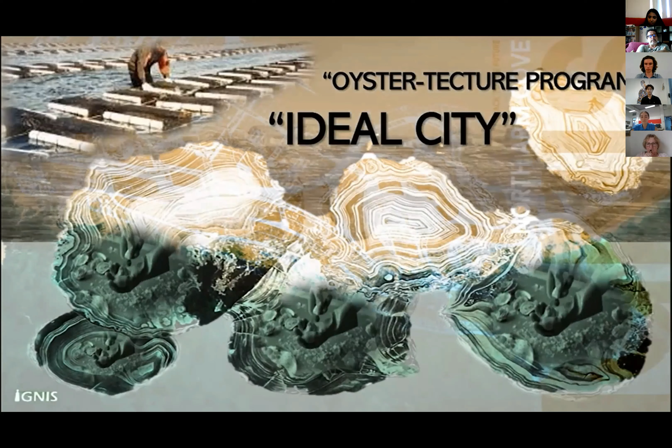By returning to Walter Burley Griffin's vision for an environmentally driven North Arm Cove, an understanding of ecological communities may be applied to optimize the human community in symbiosis with the rest of life, and bring to fruition the interconnectedness of man and nature understood by its traditional custodians, the Worimi people.

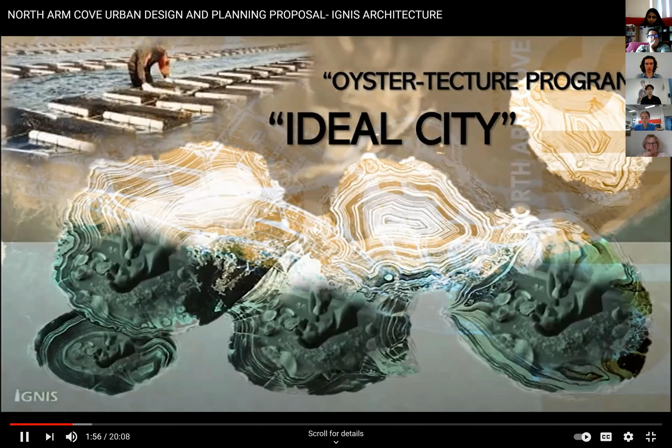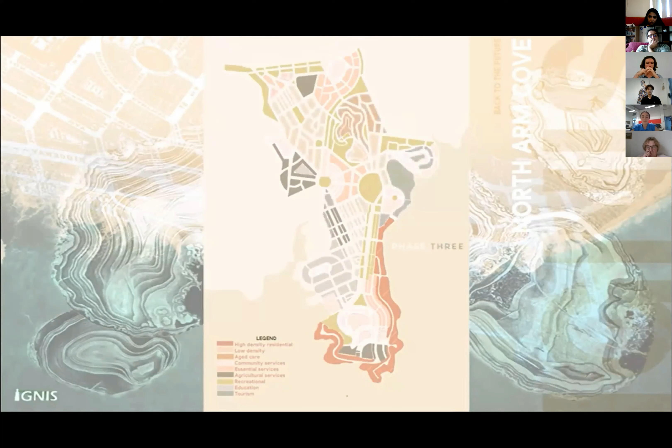To emulate nature's fundamentally collaborative pattern of whole system regeneration and growth, long-term vitality of all participants depends on the health of the entire ecosystem, allowing populations to survive and thrive in the face of growth, social isolation, and climate change. To structure the growth of Oyster-tecture, phases will categorize sectors of focus, throughout which collective participation in sustainable community and human settlement design nourishes a sense of place and identity.

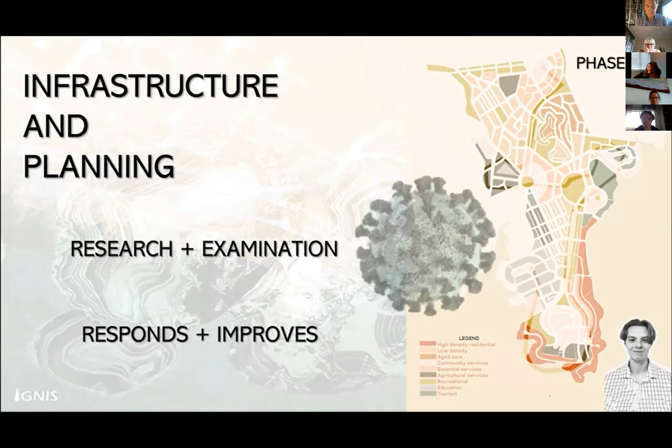Within the first phase, we look to redeveloping the infrastructure and planning of the region, specifically within the CBD. Through research and examination of the current dilemmas that have affected the health of public spaces, we have developed a scheme that responds to such situations and improves the lifestyle of those residing in the region.

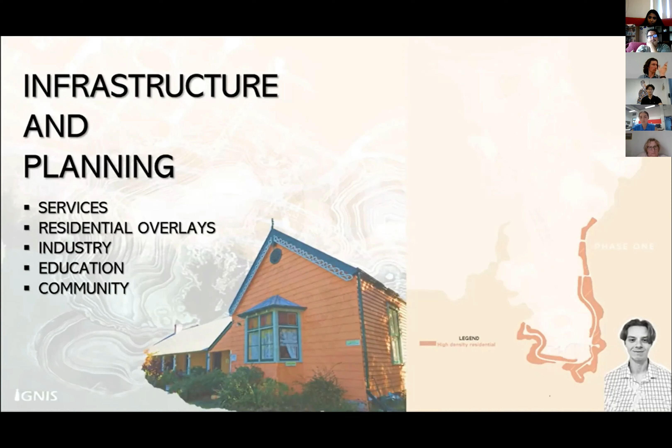In reconfiguring the land between services, residential overlays, industry, education and communal facilities, we have chosen to concentrate the residential areas in the existing layout along the eastern and southern coastlines. This will allow us to maintain the heritage sites within the residential areas, much like the pre-1946 council overlays in Brisbane, which ensure any development within existing heritage locations does not alter the heritage nature of the region.

Nestled within the residential areas for accessibility purposes is our community services, including the development of parkland and a new community centre. Along the southwest coast, adjacent to the community spaces, is our proposed development for the education facilities. The land is currently not developed, but has reasonable access to both residential areas and the coast, which will be used by our proposed aquaculture school for research.

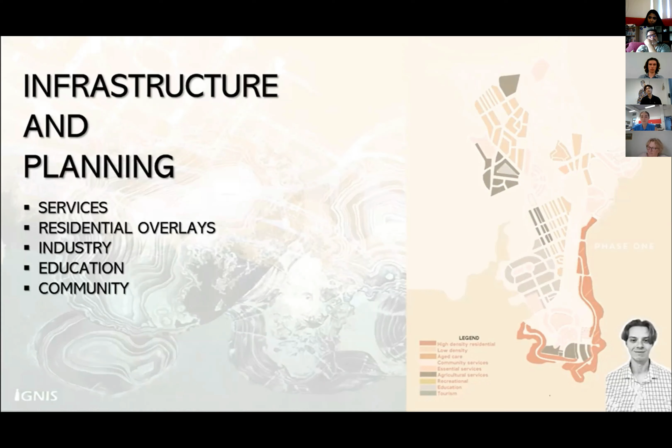Along the northeastern coast, we propose to develop a marina to encourage tourism and further the existing local industry. We also propose extensive recreational parkland and retail outlets reaching from the southern inland of the peninsula towards the northern regions, extending into the agricultural regions, alongside the lower density residential areas.

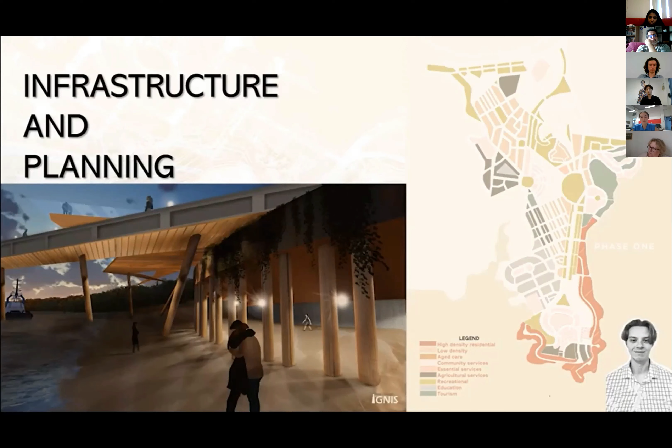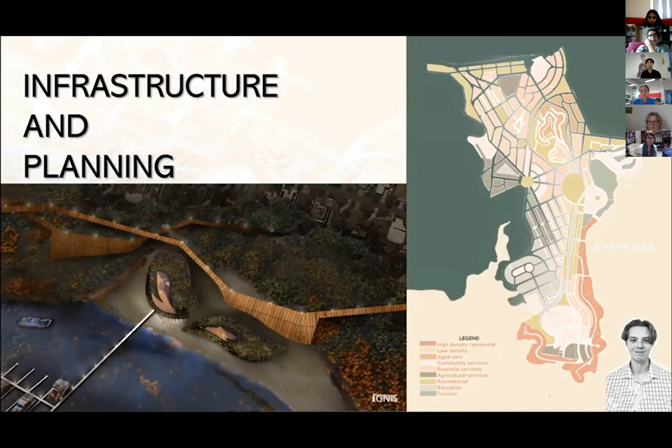In the northern region, we plan to provide facilities for essential services, allowing for crisis response within close proximity to aged care facilities, keeping them a priority within our healthcare system. Beyond the peninsula, a large amount of farmland will be preserved in order to maintain the region's pre-existing agricultural industry.

A major part of the planning process within this first phase is redeveloping and integrating transportation systems. A key concern for these systems was accessibility, while still encouraging a sustainable outcome. The current transportation relies on a large mass of convoluted routes branching off the main highway into the region. This leads to unnecessary lengthy travel times and an increase in fuel emissions from cars.

Due to a lack of publicly accessible systems, we propose to limit car usage through the provision of a well-integrated tram system, legislation of limited car usage within the CBD, and the installation of numerous electric charging stations using solar power to encourage the use of electric cars.

The road network and general layout originally put forward by Walter Burley Griffin will be mostly maintained to avoid unnecessary subdivision costs. The city centre will also be mostly closed off to cars in favour of public transport, walking and cycling. However, there will still be main roads for cars through the centre, as well as access points for emergency services.

Another major transportation system will be the construction of direct bicycle paths and coastal pedestrian pathways. This will form a radial bicycle network which branches out from the CBD to tourism interest and educational facilities, which will encourage the city's population to stay active and rely on sustainable transportation systems.

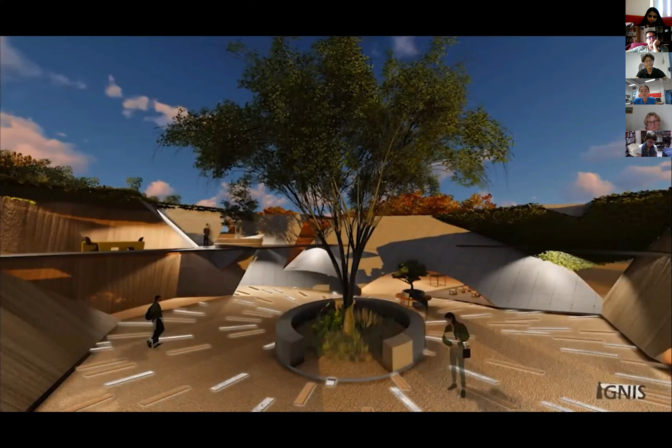As a team, we have developed a design proposal for our proposed community center, which includes equity for various members of the community and the way in which they are represented, while embracing the culture of the indigenous roots of the land, working with local indigenous artists to curate the architectural form and display artworks inside the center itself. The design itself physically depicts our vision for North Arm Cove, being concentric around a communal focus given its cylindrical form, with the central courtyard.

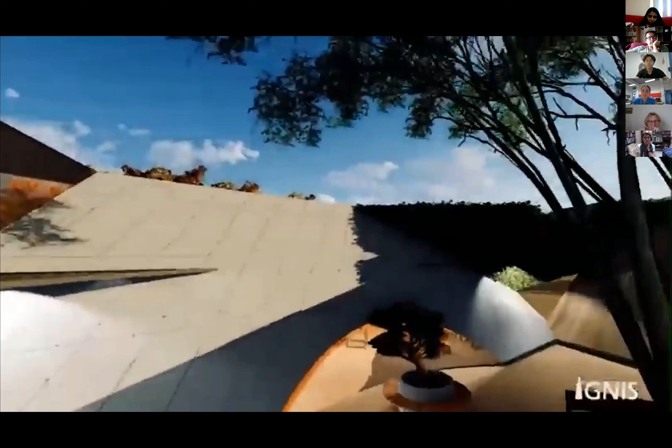Like all of the new development occurring through each of the 3 phases, the community center in the Baramy Hill region will act as a carbon-neutral development, being run entirely on clean energy through solar and tidal power, acting as an example for residents of the future of their lifestyle. Acting as an assurance of protection of culture and heritage, along with further development for the implementation of adherence of responsibility to the future generations of North Arm Cove.

Phase 3 has 2 main focuses, one being the community and their living, the other is their work through developing further industry, driving the economy. Employment opportunities and affordable housing are essential to attract immigrants to North Arm Cove.

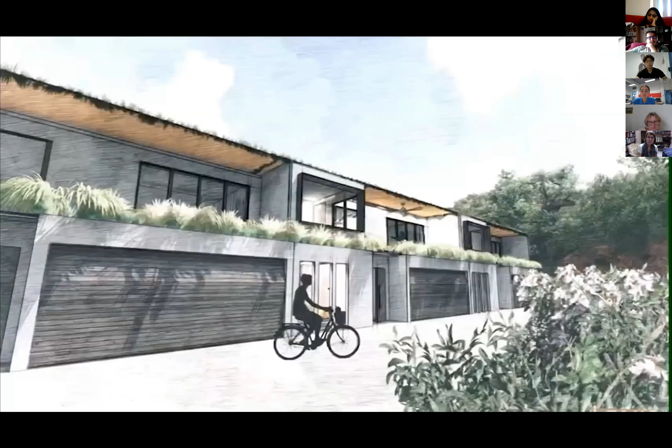In developing examples of the type of residential development we envision to include throughout Phase 3, we have designed a unitized townhouse system which allows for affordable and sustainable living. Our townhouse system incorporates functionality and lifestyle of current population, being constructed from local resources and built under strict low-emission regulations. The design also takes into consideration the work-from-home lifestyle that we have witnessed in this past year.

Making way for future crisis response as well as future globalized industry that allows one to work from home. This is realized through the manipulation of internal spaces to allow for rooms in the front portion of the house acting like living quarters, then devised working quarters split by a central courtyard.

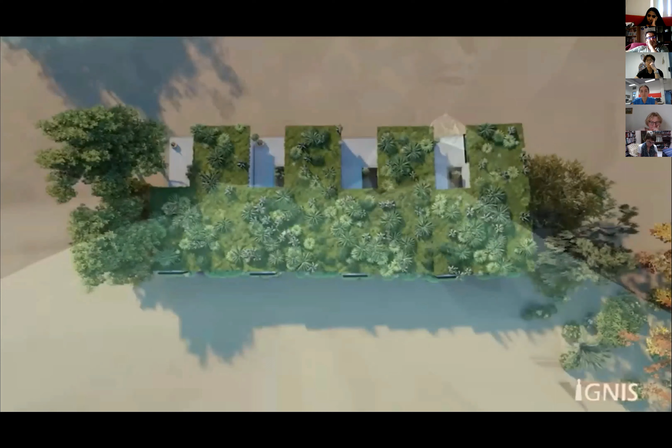To keep in line with our foresight for a carbon-neutral sustainable community, the townhouses will form a part of our solar grid with solar embedded in their green roofs. The green roofing system acts in direct response to limiting flood and increasing insulation level. Lastly, the townhouse program will encourage an increase to residential intensity, which paves the way for a more sustainable way of living and platform for future further development.

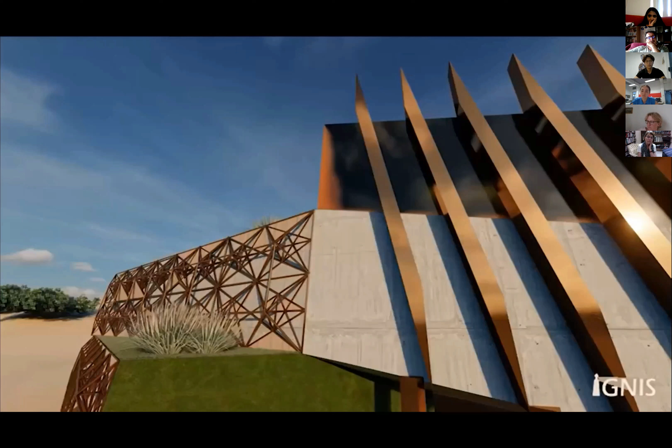The economy also relies on industry. Industry starts within the education system. During this final phase, a large part of our program includes the introduction of a design and innovation school adjacent to the now existing aquaculture and agriculture schools. Students will be encouraged to follow their further education forward through these pathways and have future input in the development and design of the region.

Planning a battery factory into the city's industrial sector can boost the city's economic growth with the niche of the lithium market. Also, the factory can provide thousands of jobs to residents of the town. Each of our 3 phases work to balance with the developing economy, with each bringing in further income into the region and expanding the industry whilst maintaining the community's living quality through affordability in residential areas with our proposed outlook for the economic future of the North Arm Cove community. We are largely optimistic given the harmonic balance of livelihood to industry and economic growth to industrial development.

A palimpsest of educational, employment, recreational, and tourism opportunities, Oyster Texture harnesses North Arm Cove's coastal land area to propagate economic and social well-being by uniting citizens with their land. It is this critical juncture of present opportunities and the possibility of future reward that design principles for North Arm Cove have been developed as a point of reference to recognize the area's essential qualities, identify its distinctive characteristics, and envision its physical development. Though tailored in response to regional conditions, the goal of building resilient, socially and environmentally conscious cities reserves broader global implications in light of historical,